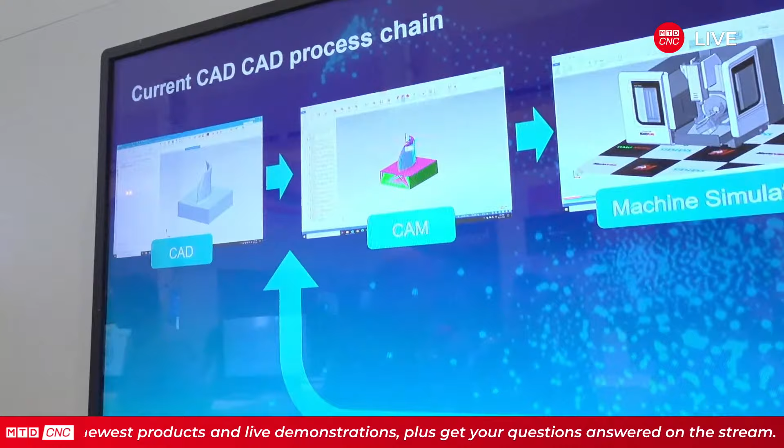So we wanted to explore that a little further, and I've got a couple slides up here we're going to talk about. This is what we consider the traditional CAD/CAM process chain. If I'm going to manufacture a part, I'm usually going to design it, or maybe I get the design from my customer, depends on what we're doing there.

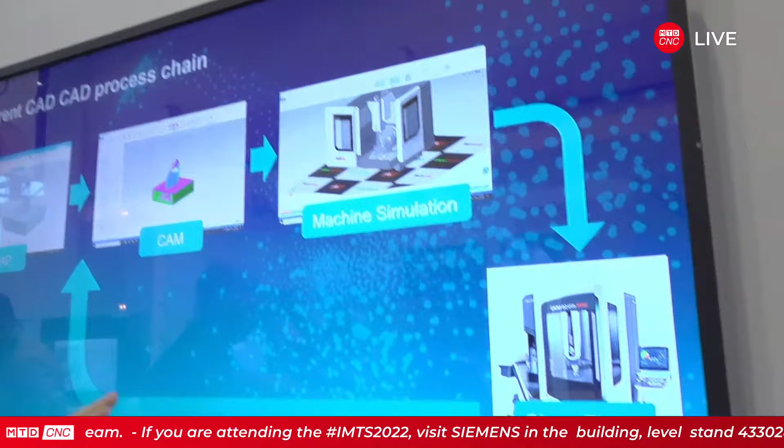But I'm going to push it into CAM. Then at some point we'll drive some simulation and drop it down on the machine floor. Now obviously you can see this is a very sequential process.

So what happens if there's an issue in any piece of this chain? Well, now I've got to start almost from the beginning again. At this point, it doesn't make sense to reset up the machine, so now it's sitting idle. So how do we take this process and adapt it so we can really optimize the flow?

So what we did, we said, okay, where are the challenges coming from? First, when I'm up in my programming department, I want to see what's going to really happen down on that machine tool floor. However, there's a lot of challenges when starting to look at the whole digital twin concept, right? We hear all about that these days.

So we want to take a look and see, well, what can we do so the programmers know exactly how that machine's going to behave? And even beyond that, how do they know what the quality of the part's going to look like even before we've cut the first chip?

Now at that point, we're probably ready to start setting up the machine, dropping in some tools. What's the worst thing when I know I need that half-inch end mill, and boy, it's nowhere in the shop to be found? I'm going to buy another one, right?

So the consumables are a big piece of the manufacturing process. With that, what if we can figure out a way to track our tooling better, maybe take the human element out so an operator doesn't mess up putting an offset into a control?

And now we're going to start running production. But with the production side, I want to make sure I can maintain that quality. So we're going to look at some solutions and talk a little bit about that, how we can ensure the right jobs.

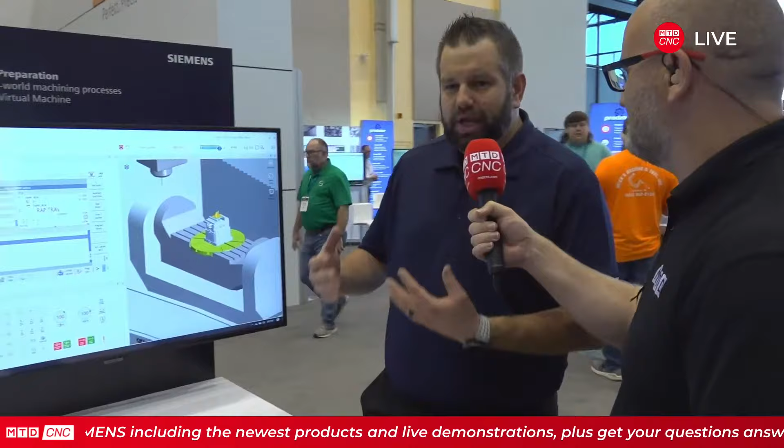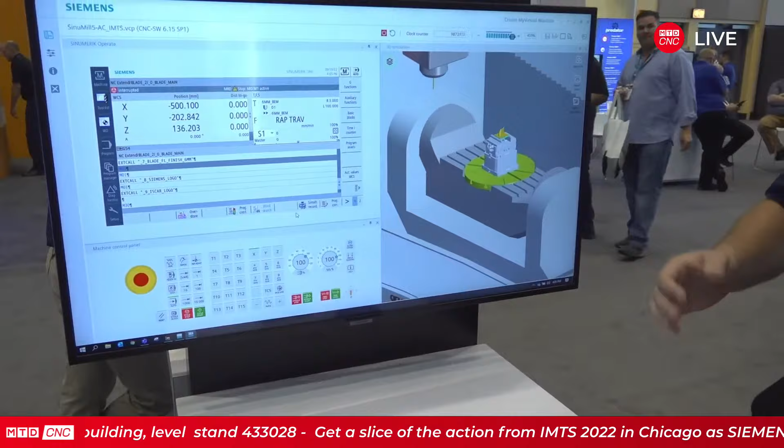Run My Virtual Machine is a new product we have with Sinumerik One. We actually have the brain of the control sitting here on my PC, and we're able to simultaneously run the code I've taken out of the CAM system and verify if there are any crashes, anything wrong with the G-code programming, or anything with the tools and the length of the tools and our whole job setup. It really gives the capability of going through the whole program and making sure nothing's wrong with it, so that when I put it on the machine, there's real ease of use and I can hit cycle start and go.

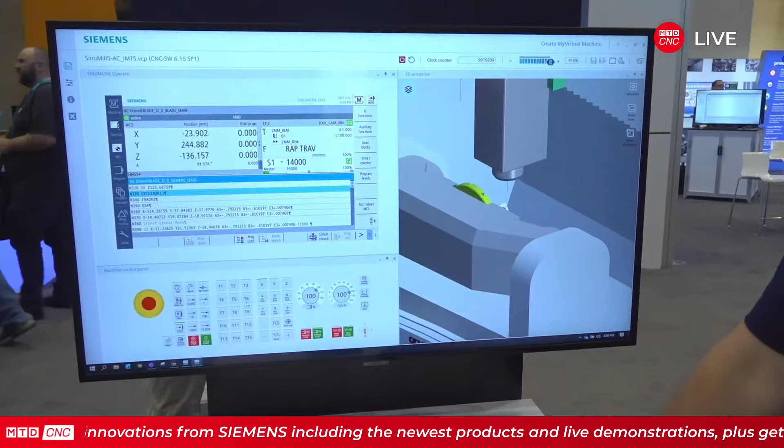So let me take you through that. If we run through this, I hit cycle start and it's going to go through and change, and we're going to simulate it. Right off the bat we had a crash.

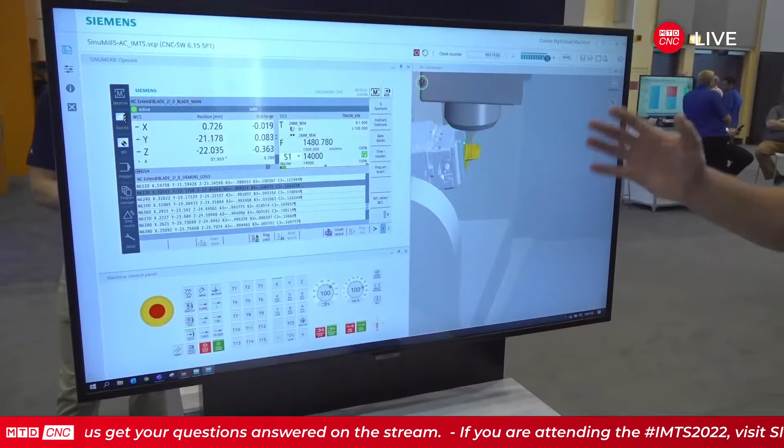We don't want to see that on the shop floor, so this would be something where I'd actually lengthen my tool so that we didn't have that issue on the shop floor. But there's a lot of variables in play here, things like the post-processor. How is that factored in?

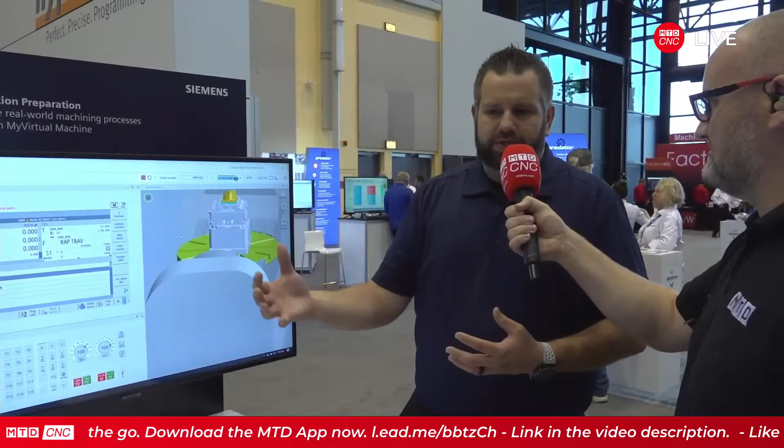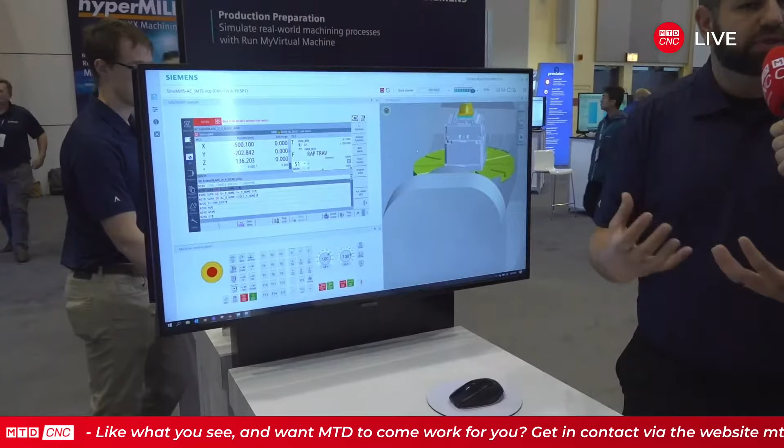When we post the code and put it through this system, because we have the brain of the control on this piece of software, it will interpret it just like it would on the machine. So it will say, oh, this is wrong with the post, or there's a syntax error here. This is a nice thing, because some of those key issues we see on the shop floor, we can address here without even leaving our desk. We haven't left our desk yet.

That's a big advantage of you supplying the software in this case, the drives, the controls. It's all coming from Siemens.

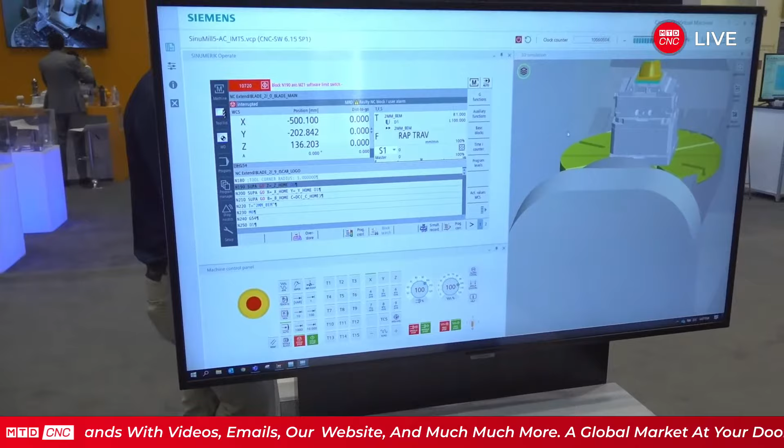Yes, correct. So this is what I would call a true digital twin, because one of the pieces of the puzzle we needed was simulation for a digital twin, along with the NC and the PLC, and that's this piece of software. It has both the NC and the PLC, so you're going to get a true, one-to-one cycle time.

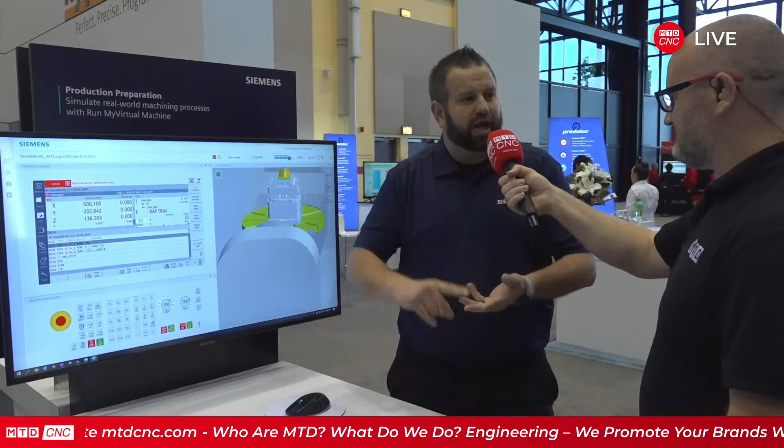Because we have the brain on this piece of software, we can actually pull a trace out of it, and this is what I'm really passionate about, what Chris said. We post the code out and run it here, check the collisions, check the code, it looks good. But how did it run on the machine? What did it do? So sitting at our desk, we can run a trace from our machine and look at the load of the spindle, the load of our drives, how it interpreted the code. We can move that into a piece of software called Analyze My Toolpath, and we start to see some interesting things. Let's look at that.

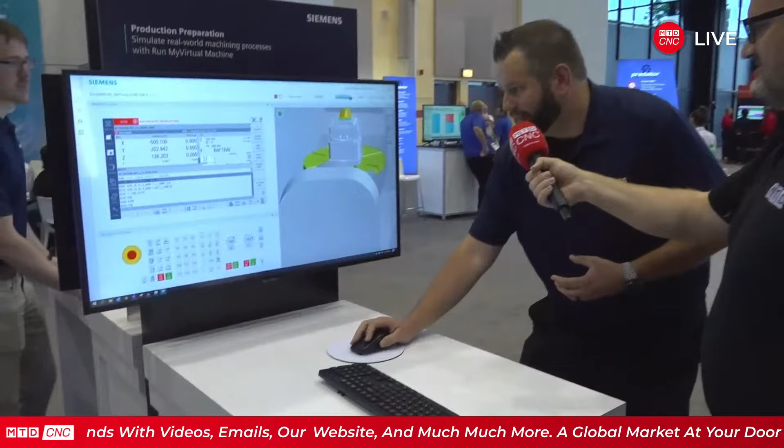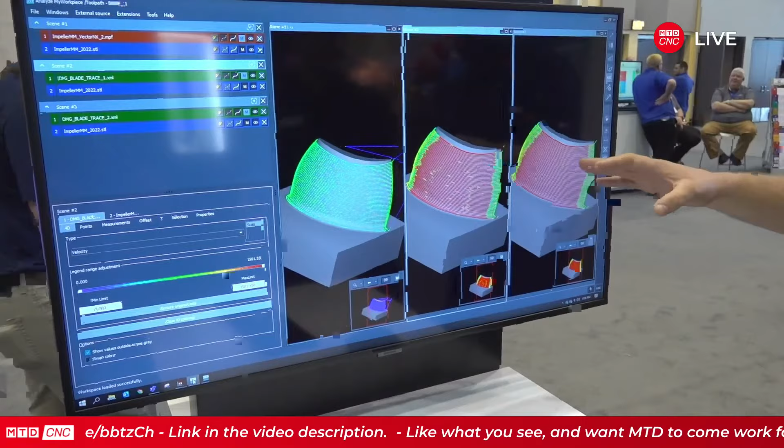When we pull up the software, all the way to the left is the G-code that came out of the post-processor, and to the right is the actual trace coming out of Run My Virtual Machine. We've traced it, and the red and green show how the control interpreted the posted code from the CAM system. As you can notice, there's a lot of red in the middle of our part, and these might be gouges or slowdowns of the machine.

Red is actually a 50% reduction in the program feed rate, and what that means is you might see a gouge there, you might see a little witness mark. This is really what happens: we go down to the control, run the part, and then, oh, it's not good. We have to go back up to the programming room, post it out again, and go back down.

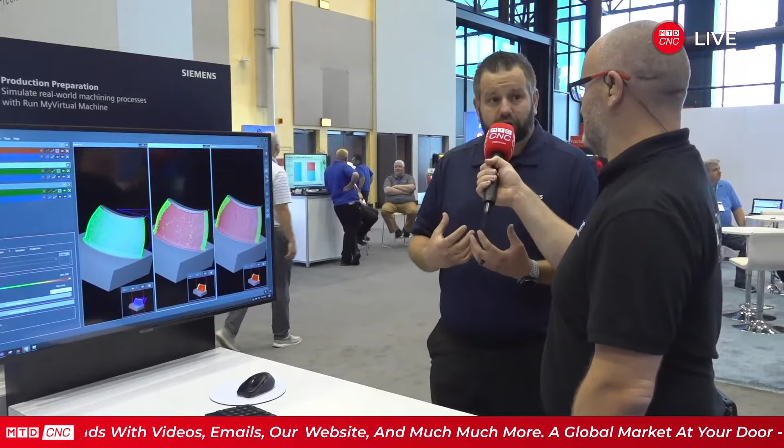Because of the technology cycles under our control, I just put in one line of code. I didn't change the program, didn't repost it, I put one technology cycle into this posted code already, and we got a smooth transition and a really smooth part. I didn't even have to walk down to the machine. I posted that out, put that technology cycle in there, ran another trace, went back to Analyze My Toolpath, and got a smooth part.

Now I'm going to walk down to the machine and press cycle start.

Just to wrap up, how much intervention from a human being? One person. So how much of this is operator intensive, programmer intensive? Not at all, really. It's just setting up the trace, hitting cycle start, pulling that trace out—it's an XML file—and dumping it in here. It's really easy to see what's going on and visually see what you need to change.

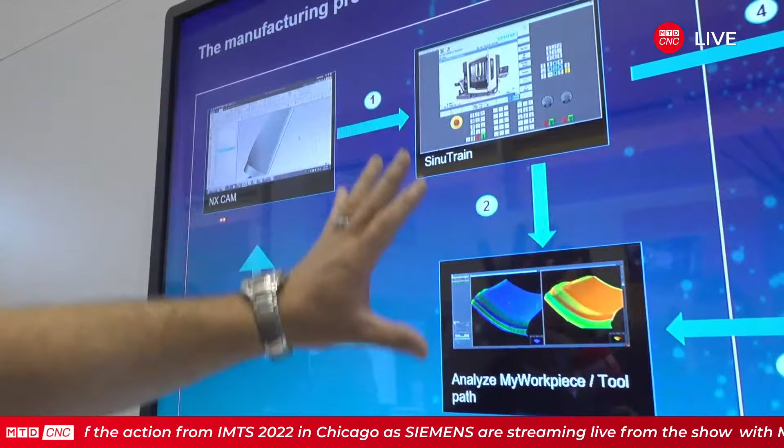So really what we're showing is our rethought-out process of the CAD/CAM manufacturing process chain. By empowering the programming department, we can stay within their world a little bit longer, but really start to ensure that when we get down on the floor, we can reduce that downtime.

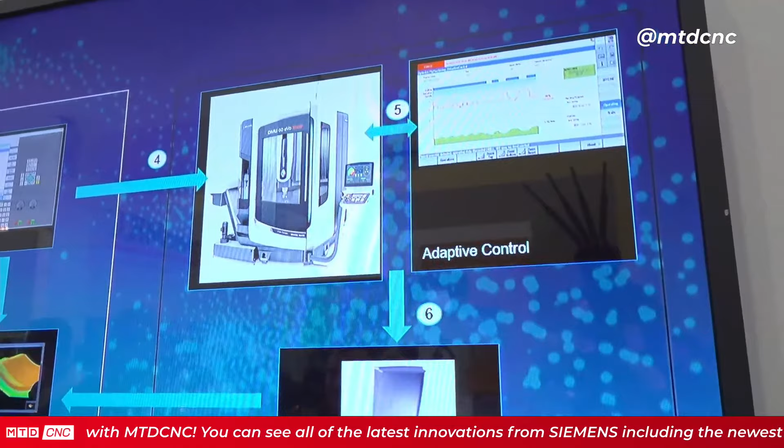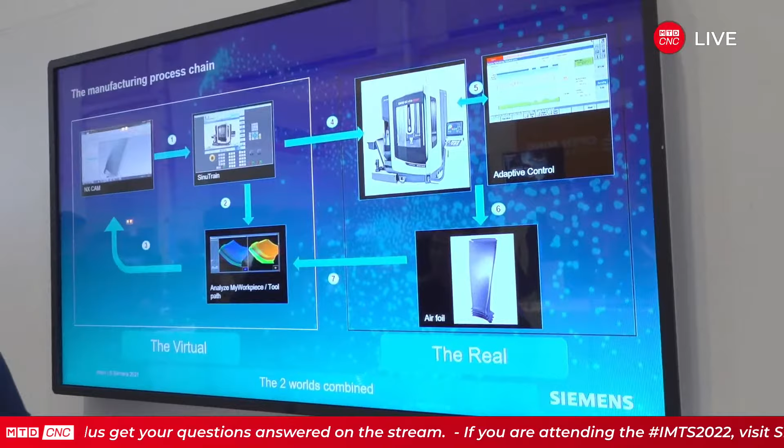Now the next step in the piece is now we're really starting to produce some parts, so how do I manage to maintain the quality of these parts? Everybody hears about Industry 4.0, digitalization - so what does that mean? Well, what you tend to find is you jump in, you start grabbing all this data out of the machine, and you have no idea what to do with it. Well, we figured out something to do with it. Well, it's about time somebody did. Thank you for doing that.

Absolutely, so what you're going to see is we're going to jump over to Gus. Gus is my IT specialist - he's the guru, and he's figured out how we can pull this data out of the machine and be monitoring the machine real time to ensure that we maintain the highest quality part within the spec that we need for our customer. Absolutely perfect - well Gus, the guru, take this away my friend.